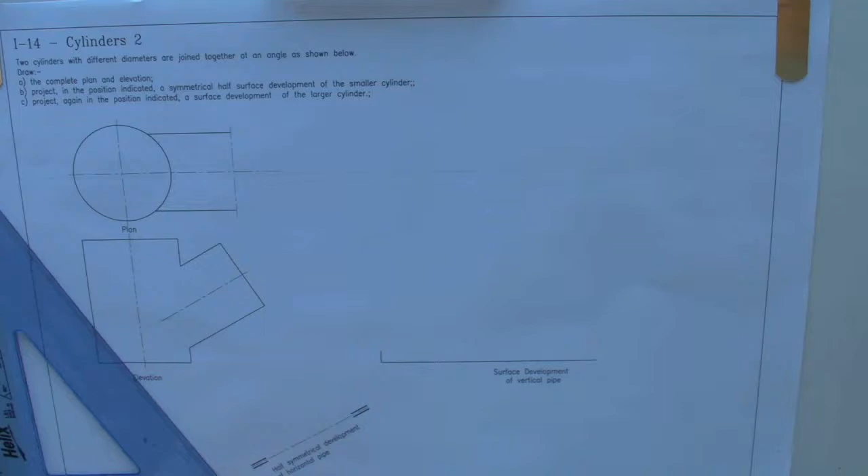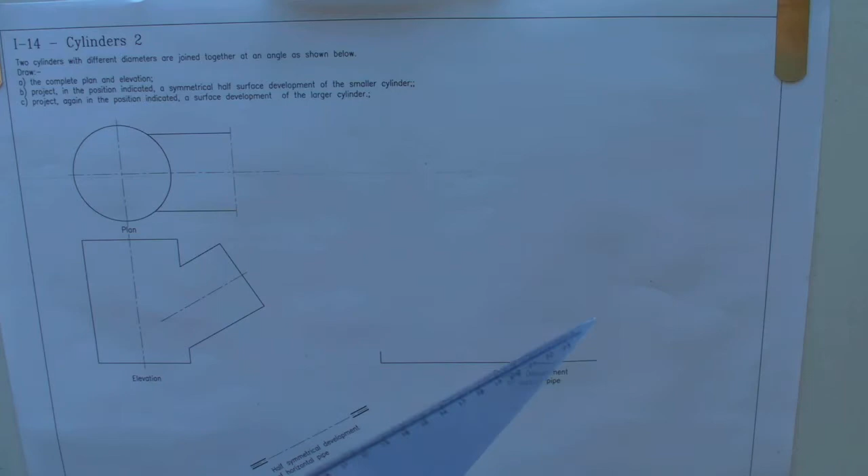Okay, this is first geometric construction one. When you're doing geometric construction, it's all about projecting lines, and it's all about orthographic projection and generators, basically. So we're going to start off. Basically, this is two cylinders which are joined together.

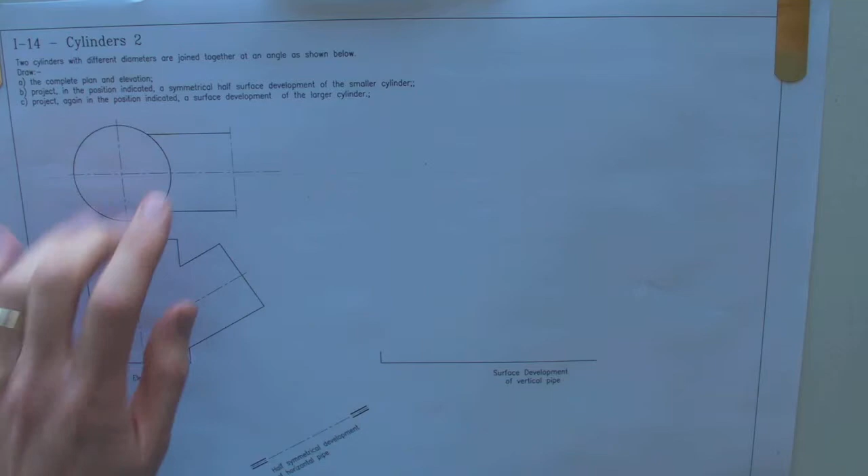Okay, so this is the big one, this is a smaller one. Now it could be that's a pipe and that's a drain pipe going into it, or whatever. We don't really know what it is, but first of all we have to do the completed plan and elevation. So plan here, elevation here, and if you think about it, if this is a cylinder here, then if you're looking at it from above, which it is when you look at a plan, then what you're going to see is a curve here. Okay, so we need to work out where does that curve come from.

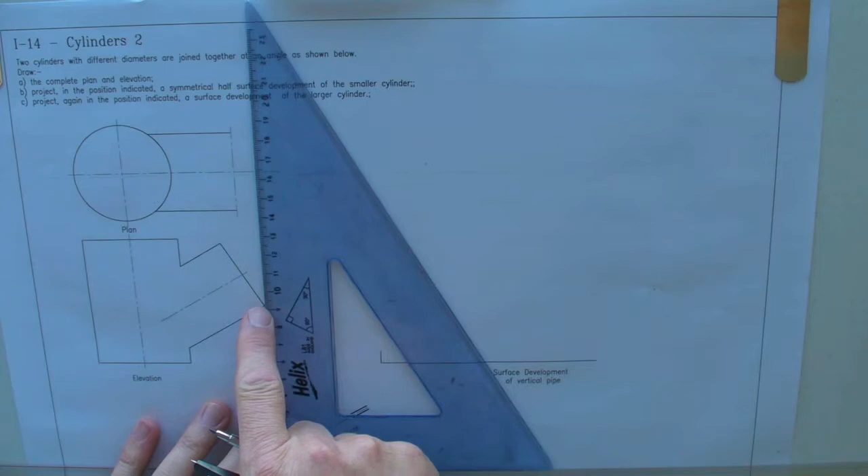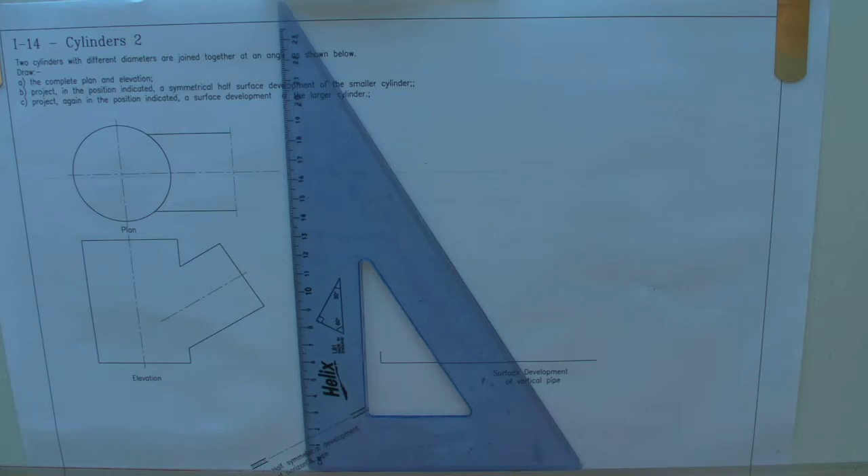Well, you can see that if you look at that line there, you're obviously going to have some information about the end of the pipe here included in this, right? So what we need to do first of all is get some generators on here, okay, and project points up from the generators up to here. Okay, and that'll allow us to work out what it looks like. So first things first is I'm going to draw a circle, semicircle, on the end of this here. Really common practice for this type of drawing.

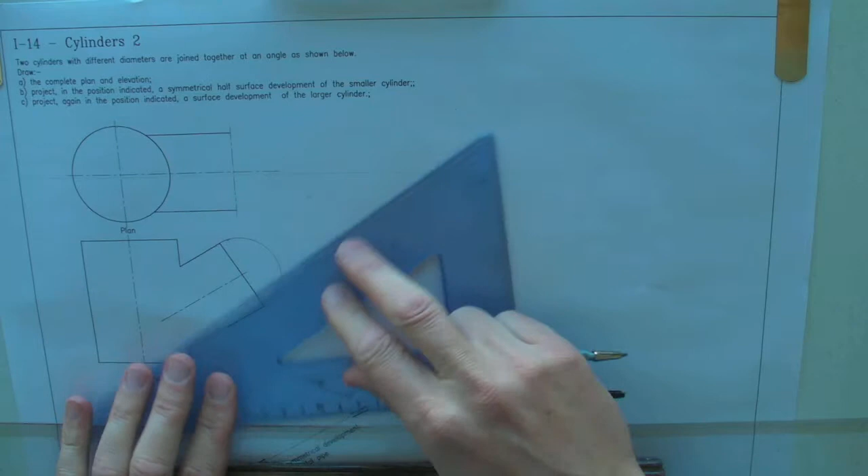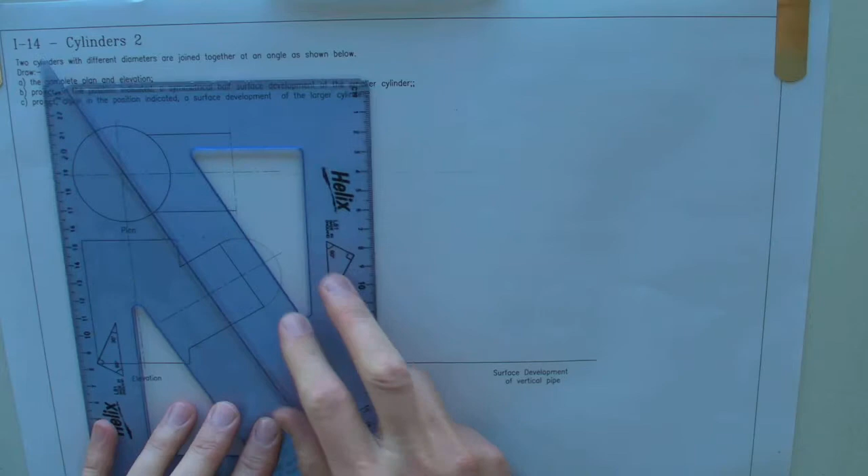Okay, so to get it right would help. Needle right into the board and then just draw it round. Okay, so I need to do generators for this now. The difference with this obviously is that it's at an angle, so how do we deal with that? Okay, well there's a couple of ways you can do it. The way that I favour is two set squares. Okay, so one there so that you've basically got it straight, and then all you need to do then is just use the two set squares to actually divide up produce your angles.

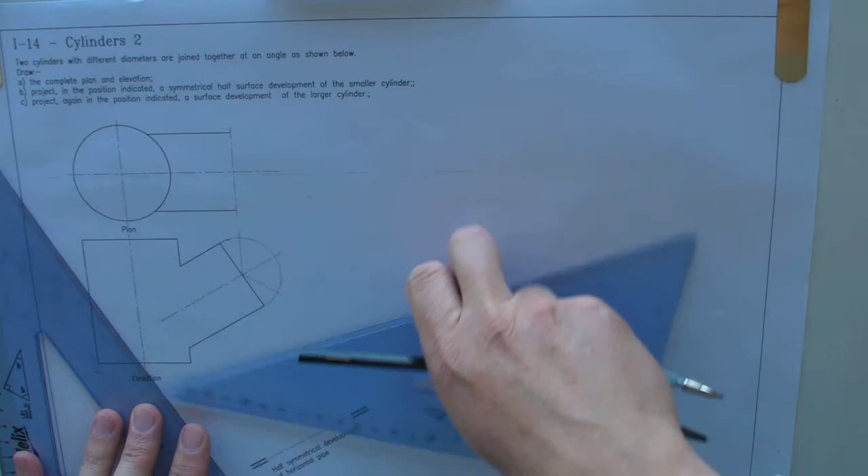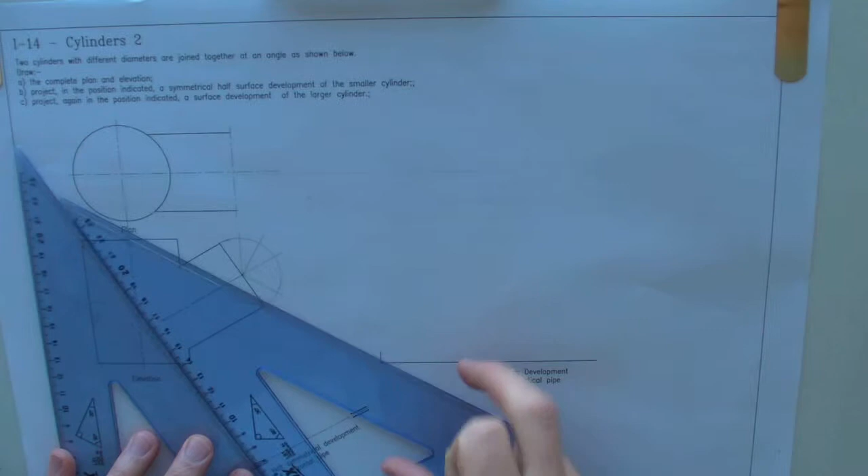Okay, so you can actually not really have too many generators when you're doing this. You can't have too many because you want as many points as you possibly can when you're doing it. It's a bit awkward this, but this is the way to do it. And then get the final one. Get it around the right way. So it's not that, obviously. It's not that. Must be that. So just have to move this right the way round. Okay, so I've now got my generated points there.

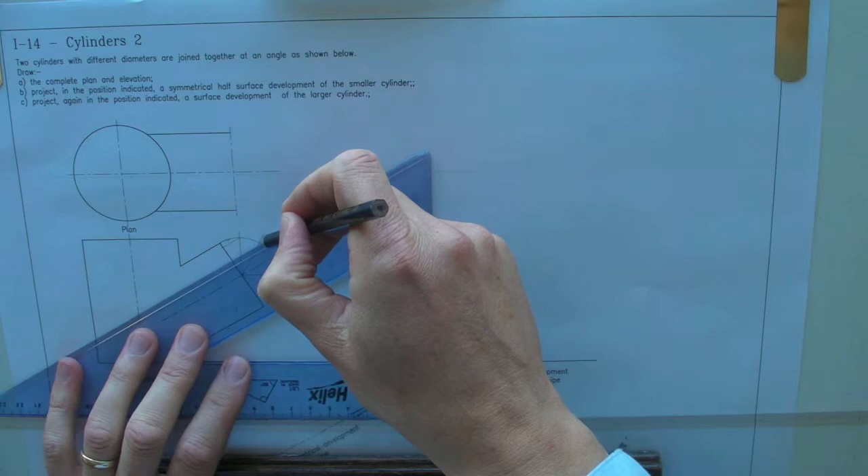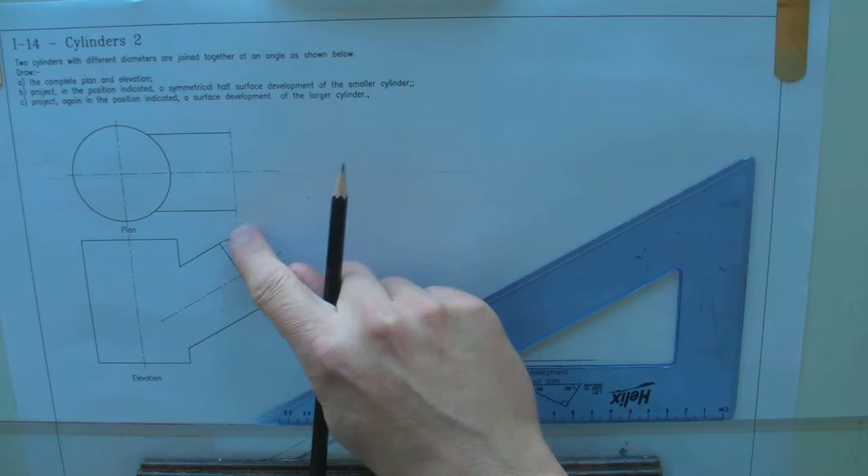Okay, and the key thing now is to use the set square here just to come down onto the edge. Okay, so what we do now is we're going to project up from each of these 7 points up to here, and we're also going to put another semicircle on the end here. Okay, and that's going to help us to form up the shapes. Right, so there's lots of generator drawing and the like, and also we're going to do some labelling as well of some of the points that we create as well.

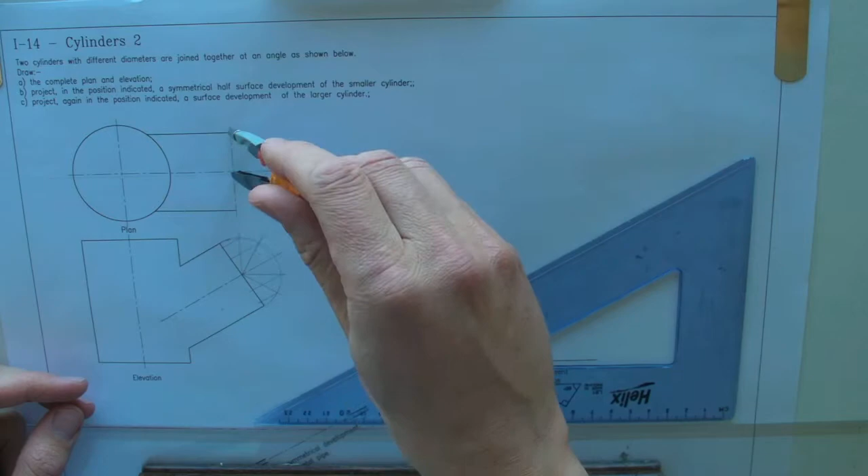So I'm just going to do the same here. This is at least a bit easier to do than that one because we're not having to worry too much about two set squares. Okay, now I'll just divide this up.

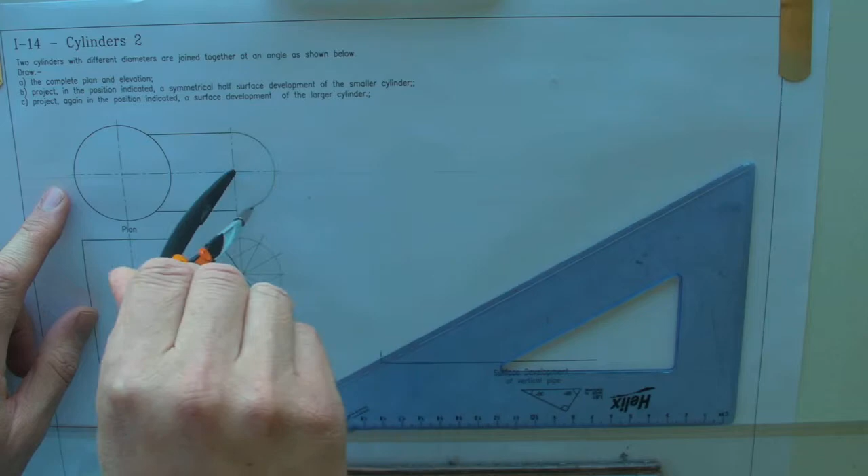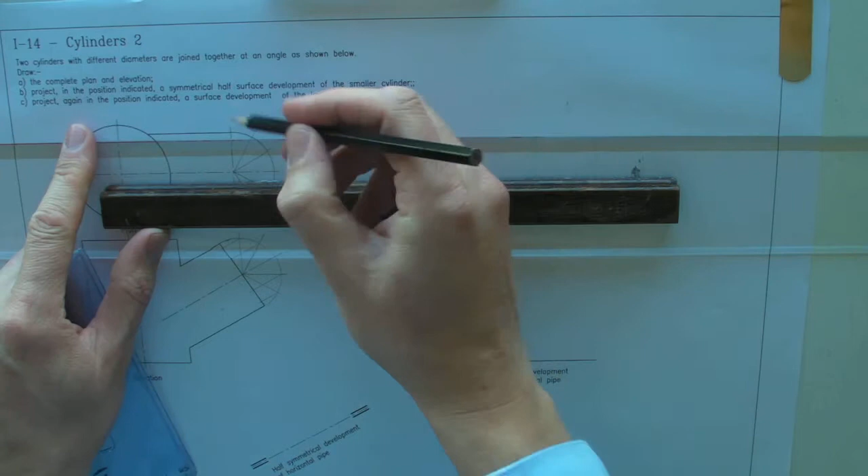Okay, and then again, just draw lines from the cut points where the generators cut the semicircle and bring these in. Need to actually extend these a bit more, as you'll see shortly.

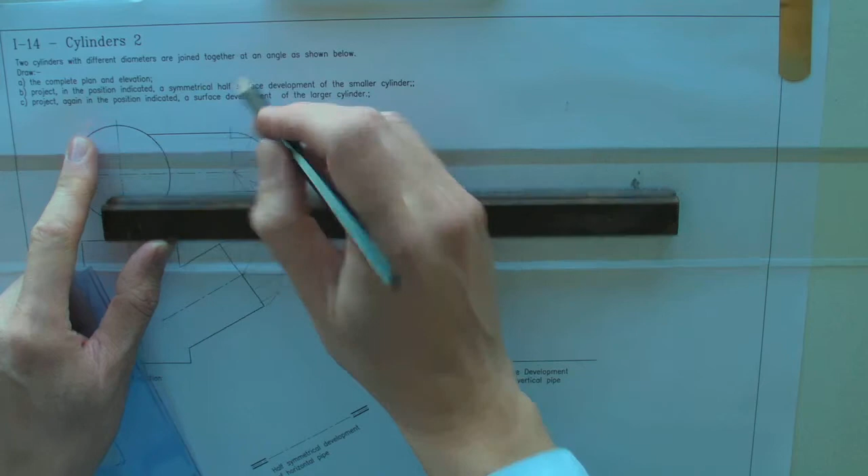Okay, so now we've got our generators. Now, what you need to think about is if I label these up, I'm going to call that A, B, C, D, E, F, and then G at the very end.

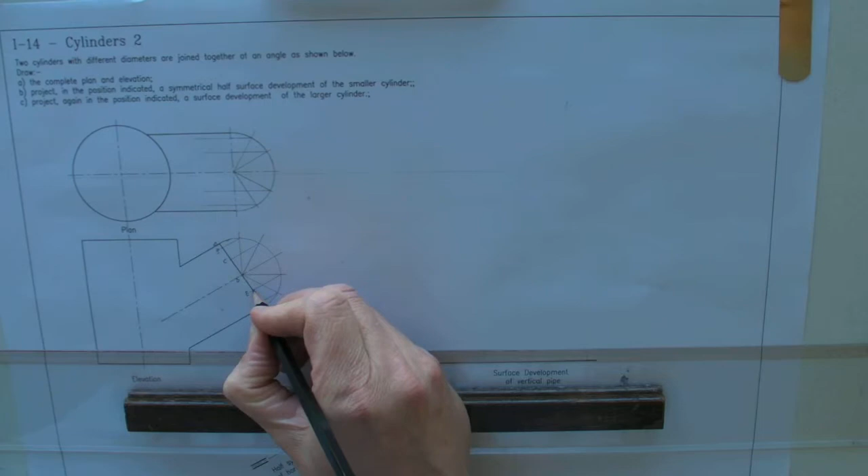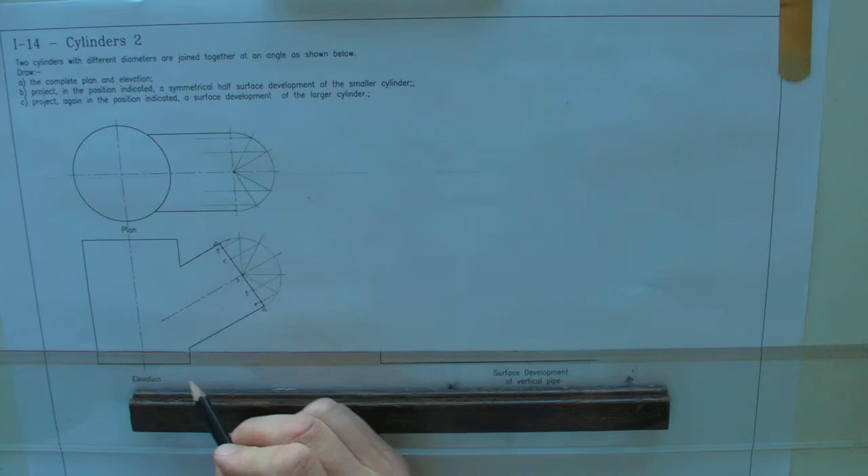Now, clearly we're looking at the side here, trying not to throw in any extra lines I don't need to. So we're looking from above, which is what we've got here. That point there is A, because that's the very top. So that means as we go down, that's B, and that's C, and then that point at the very bottom is D.

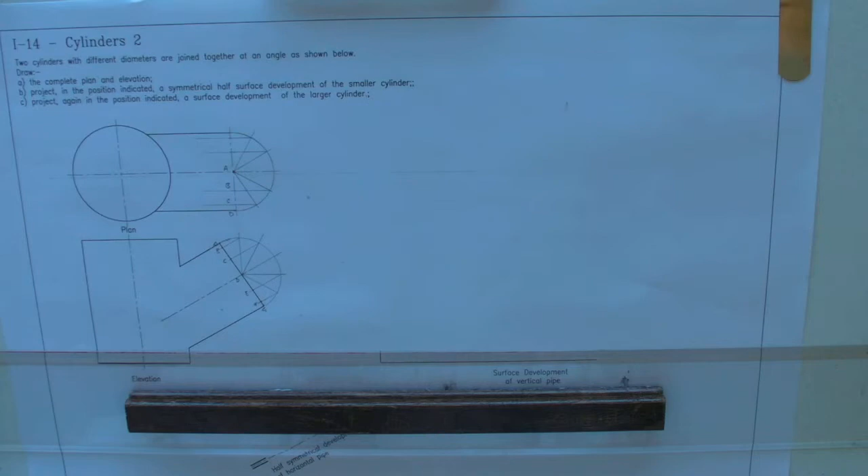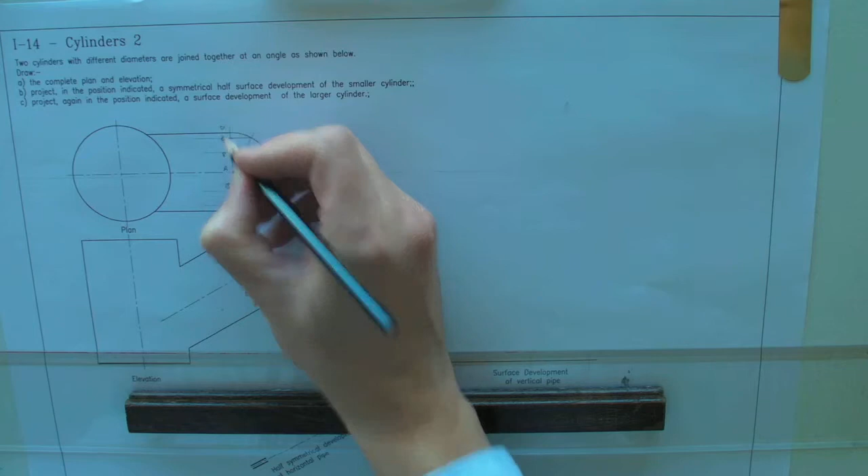And on the other side, if you can think about the other side of the line, where the centre line is here, A, you've also got B, C and D. And when it comes to E, F and G, they're obviously on the underside of it, but for the sake of what we're going to do just now, that's really all that we need to think about.

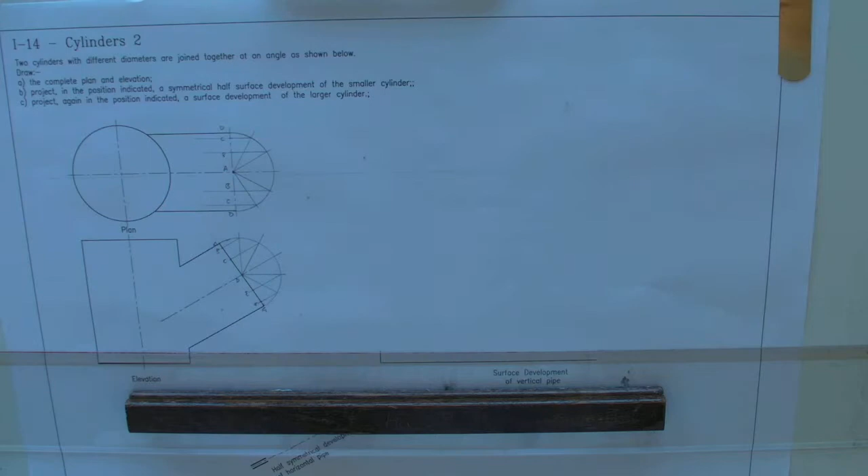Right, so what do we do now? Well, what we do now is we're going to project up from these points until they meet their corresponding lines up here, and that's going to allow us to form an ellipse here, which will be what we would see at the end of it.

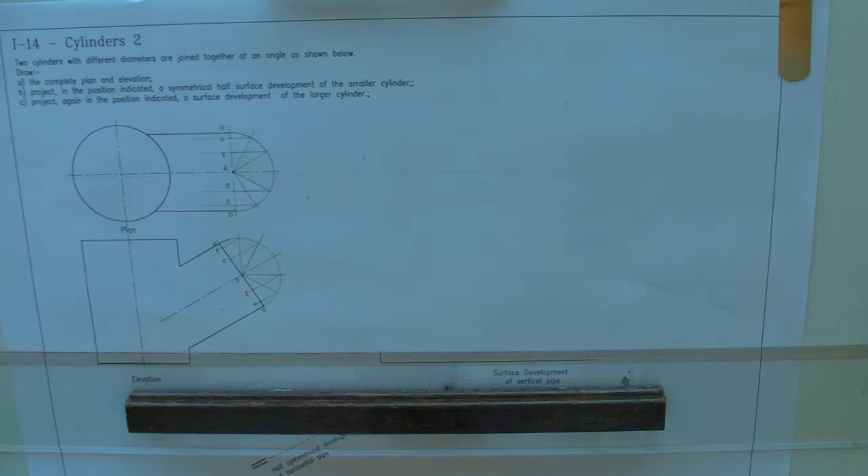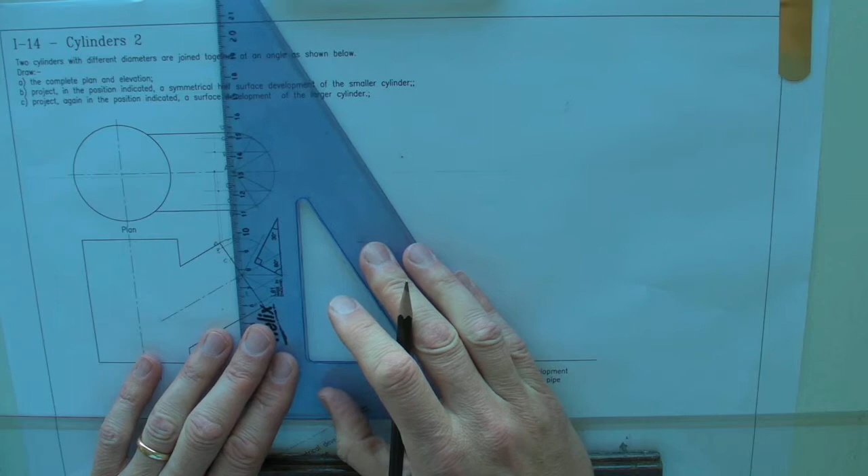So now project up. From A, I know there's going to be a point there. From B, take that right the way through, because I've got two B's - I've got B there, I've got B there. From C, C there, and C there. And then from D, it's there, and there.

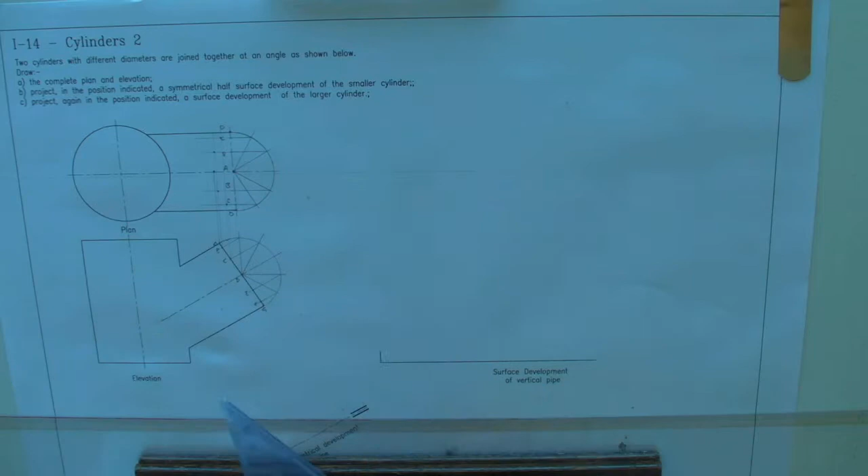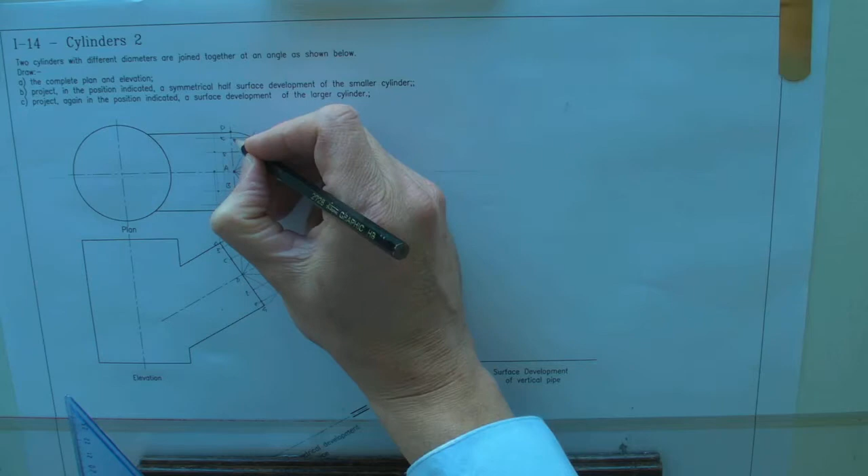Okay, now we've got to think about E, F and G. If you think about the shape of this - it's obviously a cylinder - C and E are going to be directly below one another. So I'm going to write E on this side, and I'm going to write E on that side of the line.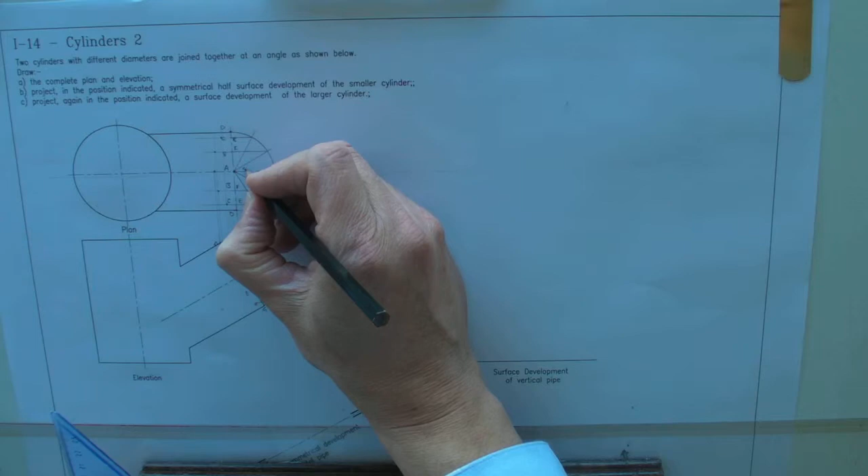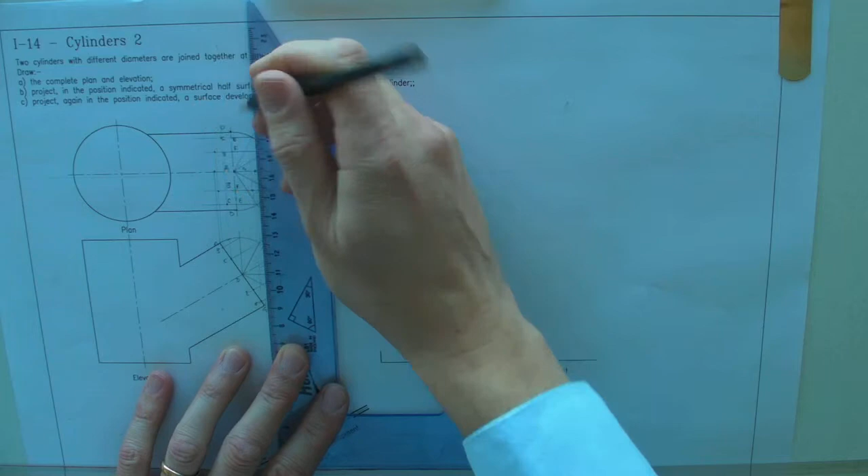Then F is going to be in the same position as B, so I'm going to write F there, and F there, and then G is going to be the same position as A, I'm going to write G there. So if I project up from G, get a point there, project up from F, I'm going to get a point there, and also a point up there, and then finally from E, project up, I'm going to get a point there, and I'm going to get a point there. Okay, so I now have enough points to form the semicircle, or the ellipse.

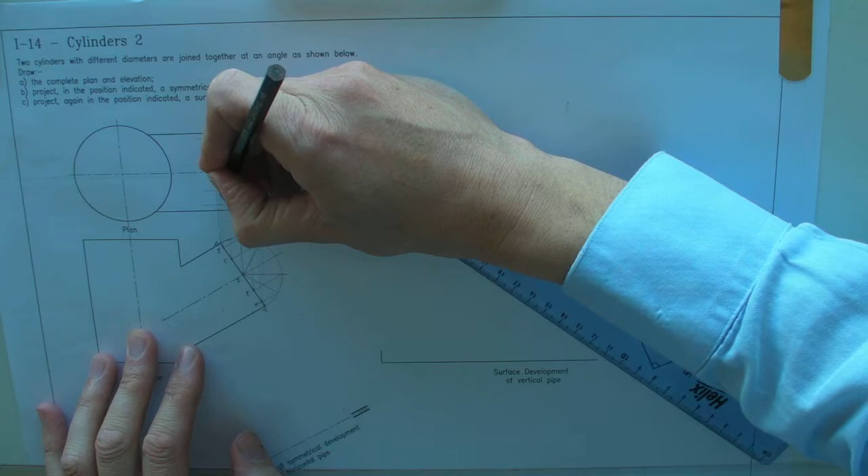So in the usual manner, a smooth curve through the points. I find going up and to the right is where I can produce my smooth curves.

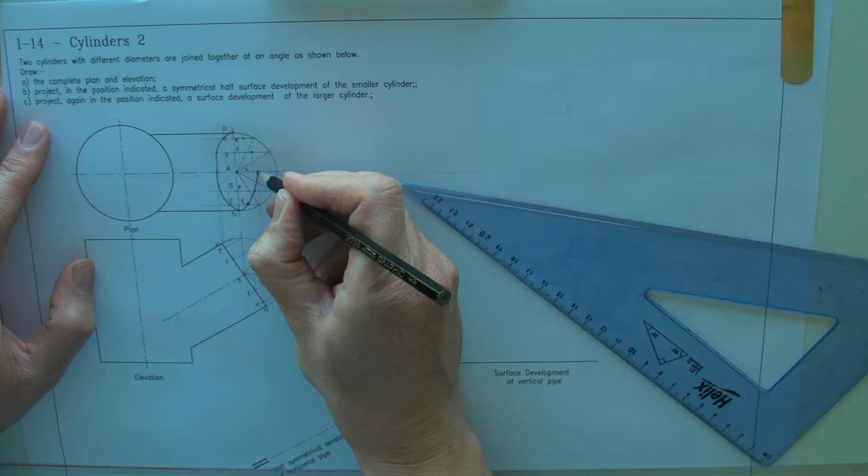Okay, so that's basically the shape of the end part, and that's the plan now completed.

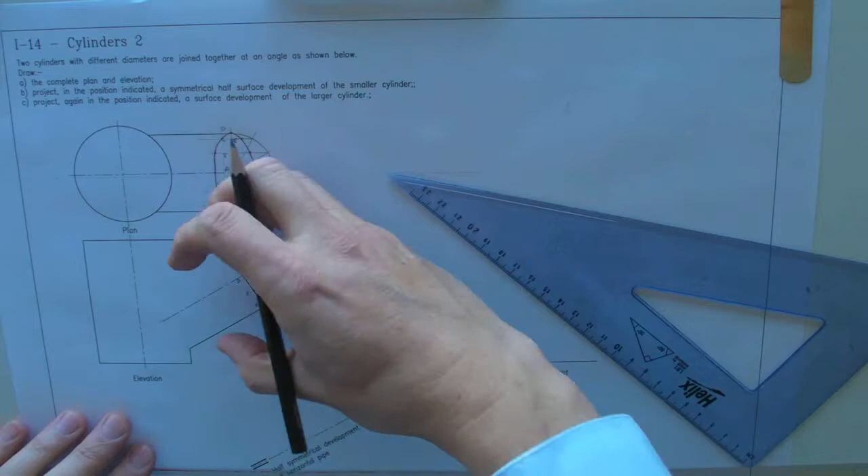What we're going to do now after this one is complete the elevation. And if you can imagine this cylinder coming and joining this cylinder, what you're going to get is a kind of curve, something like that there. It's going to be roughly like that if you imagine these surfaces meeting one another.

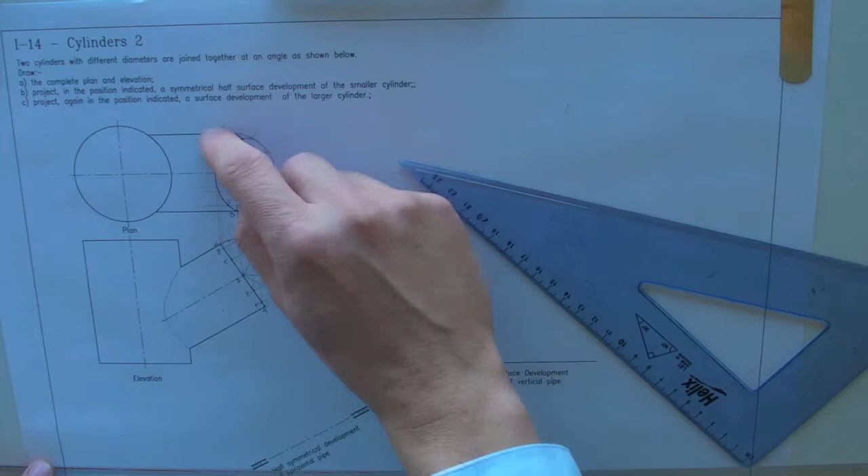And how we're going to find out where they meet is by using the same generators here to hit this surface, which will then project down, and then we'll tie them in with these generators here to produce the curve. We'll do that in the next video.